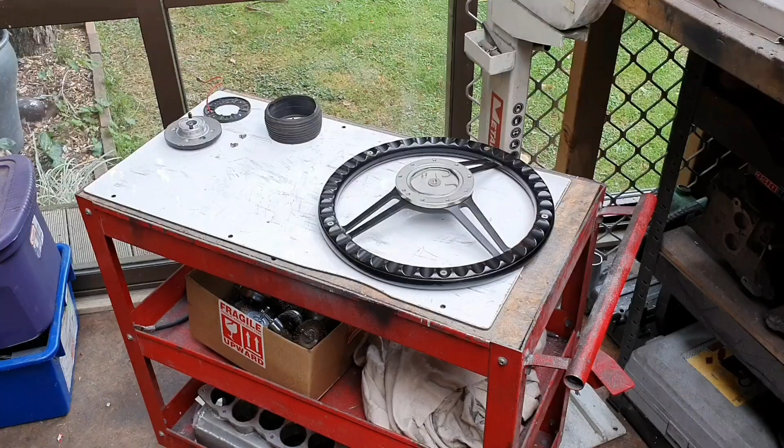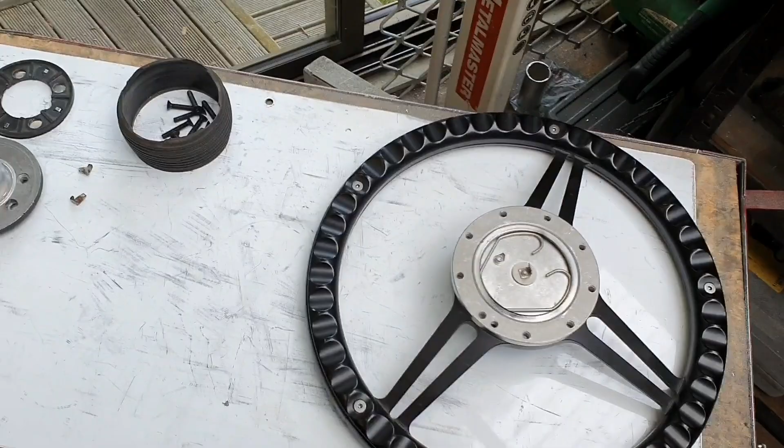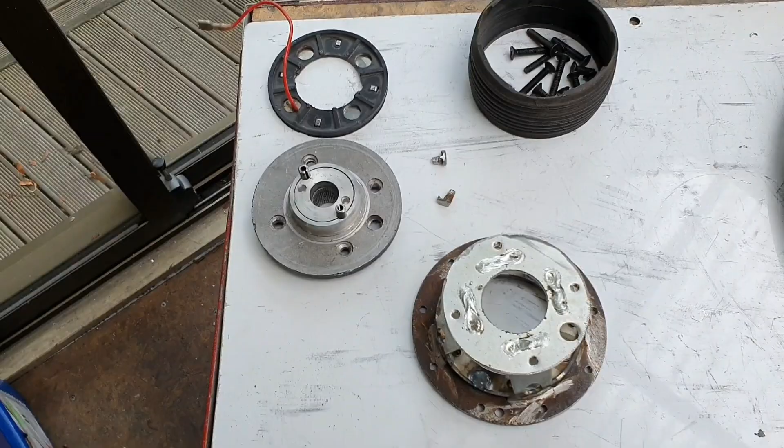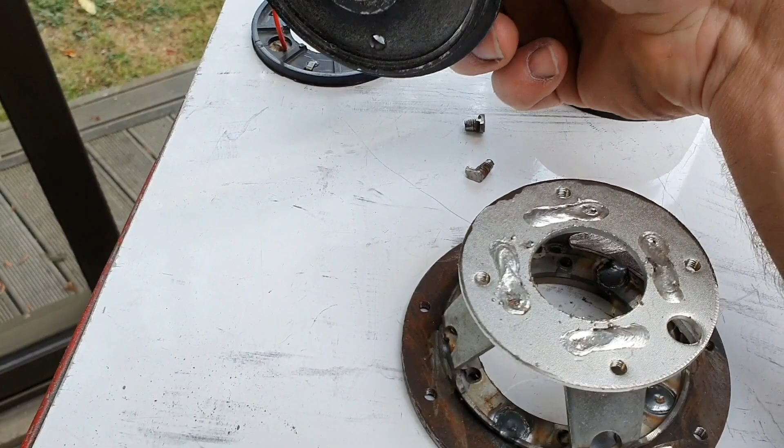Steering wheel for the Gloria. And actually, steering wheel boss. Here's the rest of the pieces that make up that. So, you go online and try and find yourself a steering wheel boss for a 1969 HA30 Nissan Gloria, and you will find there's simply no such thing. You can't buy them. Not as far as I can tell anyway, with all the research that I've done, and I've spent a lot of time looking into it.

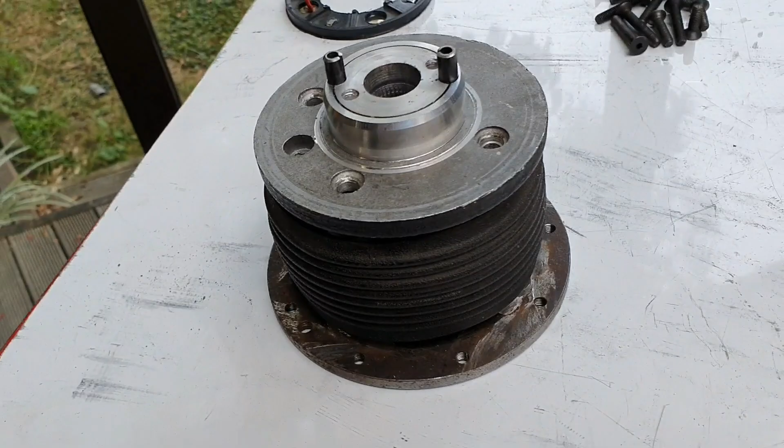This goes on there like that. That makes a steering wheel boss that has this cover, goes over this piece, makes it look pretty, a bit like that. That's probably what you're more familiar with seeing. This is from something, I don't know what it is from, but it's not from an HA30 Gloria. It doesn't fit properly, but it's close enough to do the job.

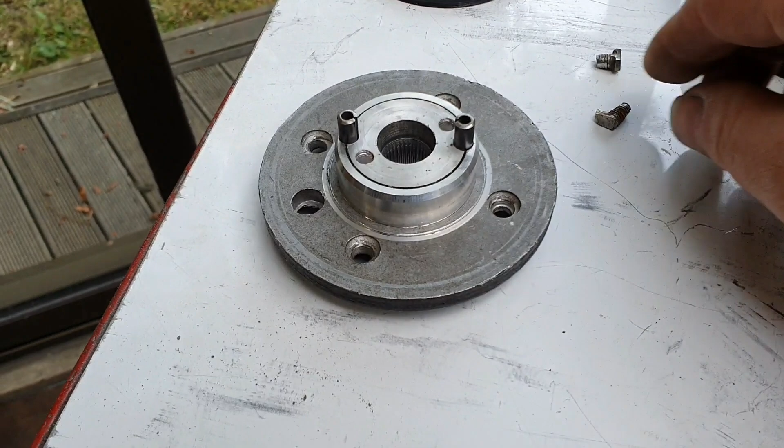Somebody had made these. These are just absolute works of art. Look, the thread on it is almost non-existent. It's almost a pin rather than a thread, and just some of the worst engineering you could imagine hanging off the end of that. A bit of weld just butchered into shape, and they were in these other holes here,

and actually, the outside edges of those were the wrong diameter to operate the indicator cancel system on the car, and also there wasn't enough height in this, and the pins weren't driving the system properly. It was riding up over the top, and they just were failing. Apart from the fact there really wasn't any grip as such, like this tapered, you can see it's a real mess into here, so the chances of these actually physically falling out and potentially jamming up the steering was pretty high. It was a good chance that could actually happen.

So this was too small a diameter, so I've taken a tiny fraction off the outside of it to get a good smooth surface. Made a collar. I was going to call it a bush. I'm going to call it a collar because it sounds better. Collar to go over the outside of it. That's pressed on there nice and tight, and then we can drill our holes, basically right smack bang on the edge of the original part that was here, and put some roll pins in there, and now the indicator cancel system works perfectly.

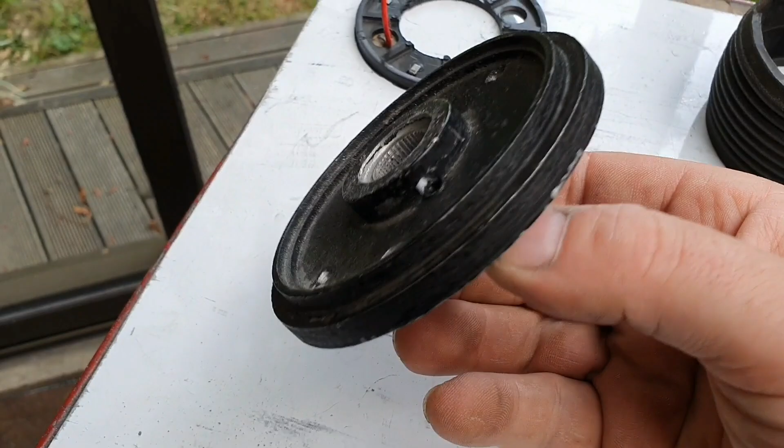So that's awesome. I fixed that. This piece here is now good to go. We're all happy with that. I'm happy with that. Certifier will be happy with that. LVVTA should be happy with it. There's no welding or anything dodgy on that, so that particular part there, that's good.

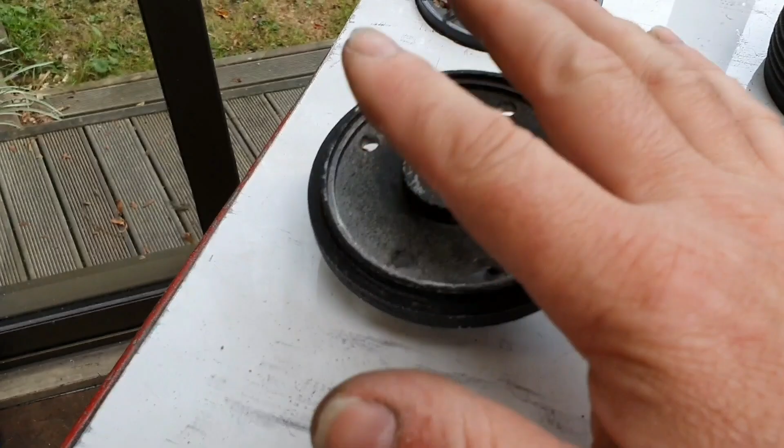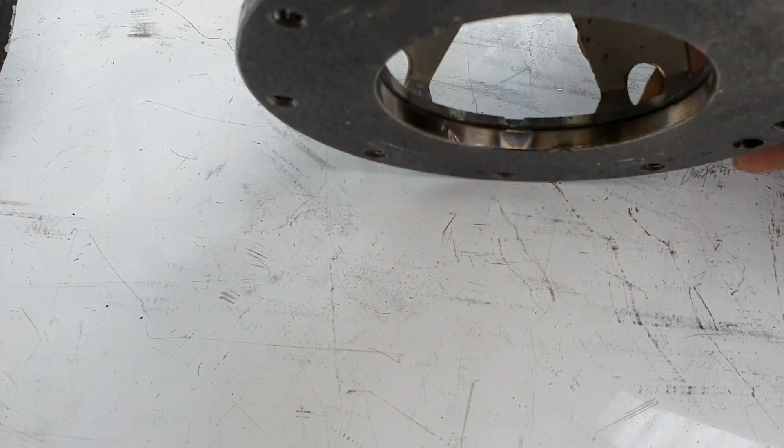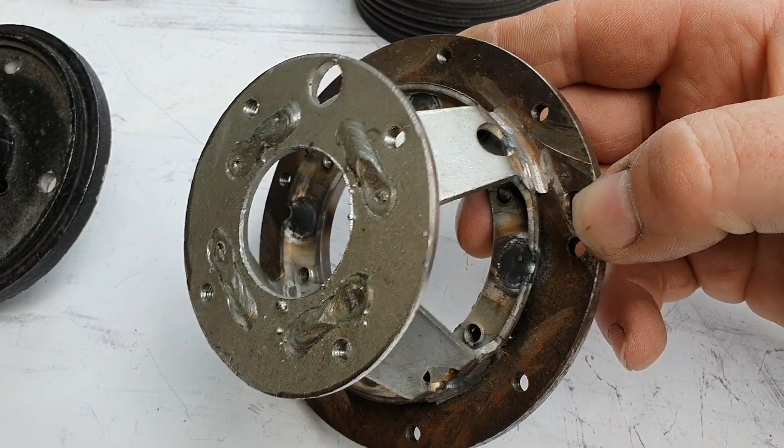This part here is scrap metal, because as you can see, somebody, apparently it was an engineer down the South Island did this for the guy that used to own the car. He's welded this plate onto here to adapt this steering wheel to fit a boss with a different PCD. Why he did it that way, don't know. It doesn't make any sense to me.

Should have drilled and countersunk some other holes in here to suit that boss, and just made a simple adapter plate rather than welding this on here and effectively writing this whole thing off and making it illegal. And then it's become my problem. That was sketchy as. I mean, it's alright, only holds the steering wheel to the car. Nothing safety critical or anything like that, right?

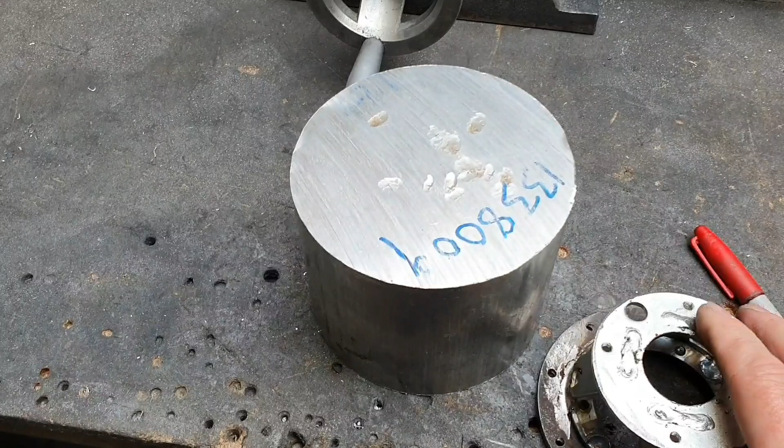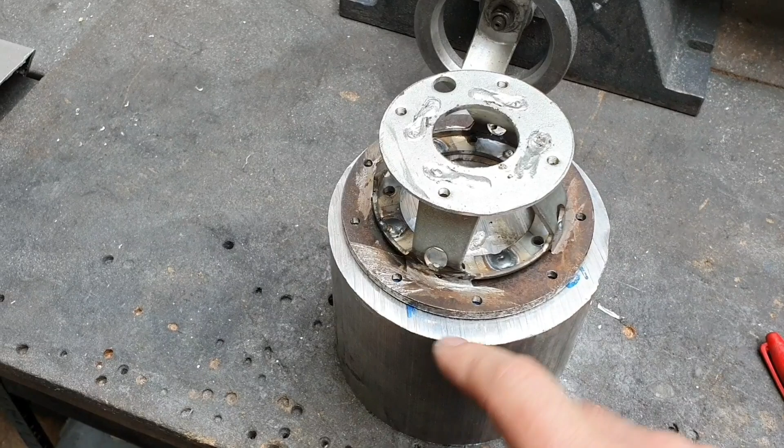What we have here is a very large lump of aluminium. I mean, the size of my hand there. I don't have tiny little hands, so it's a pretty big lump of aluminium. That's going to go on the lathe. I'm going to make that out of that effectively. That should take a little bit of time.

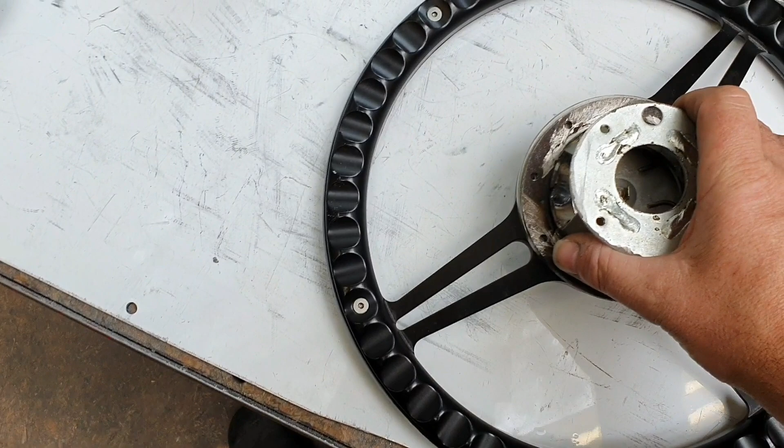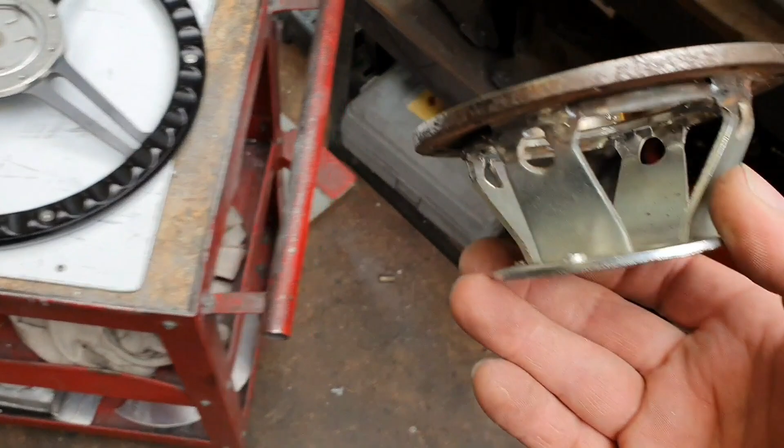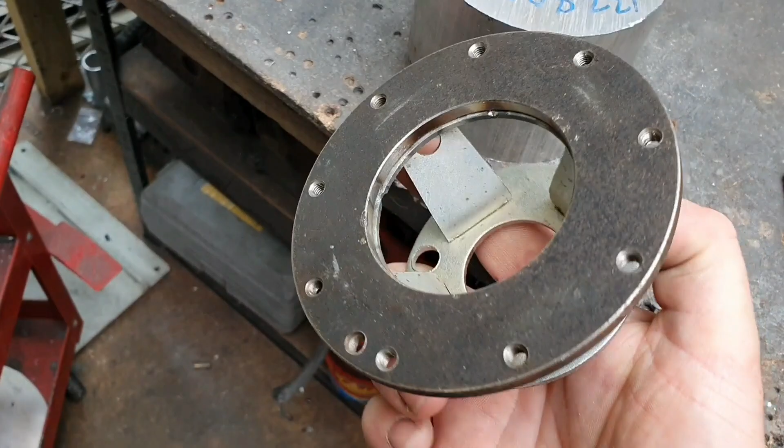We'll give it a bit more edge distance. Certifier was concerned about the edge distance, so we'll give that a bit more. Even though that was made to match up nicely with the horn adapter and all that, I'll taper it out from there so it relieves his concern about that. And we'll get on with it, we'll get it done, and then I'll smash this to pieces with a hammer, because that silly move by someone down the South Island has cost me a lot of time researching, trying to find one. You know what? Let's get started.

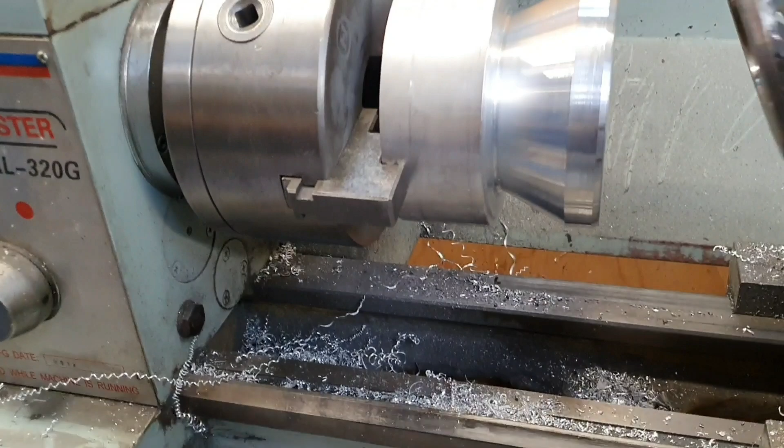Off to an okay start. Sort of got the angle, it's close, a bit big at the bottom maybe, but that's alright. Nowhere near finished yet. So that's that. It's a bit bigger, as I said. That end there, that's not bad, see that? I've tapered that out to try and make it look nice. It's pretty arty-farty, isn't it? So next step, I've got to bore out the guts of it in the middle there.

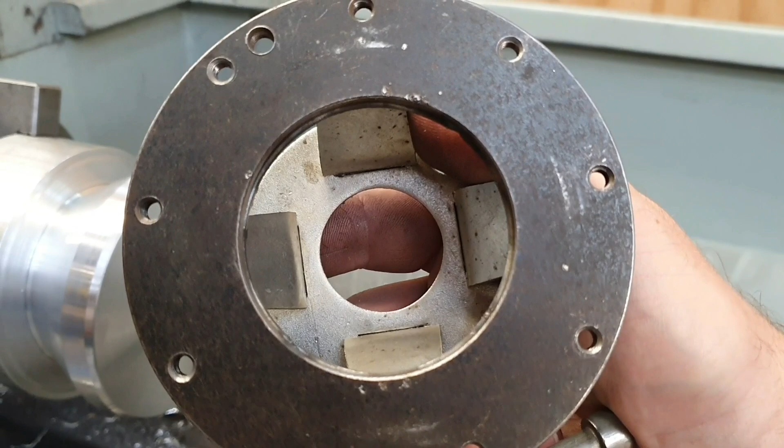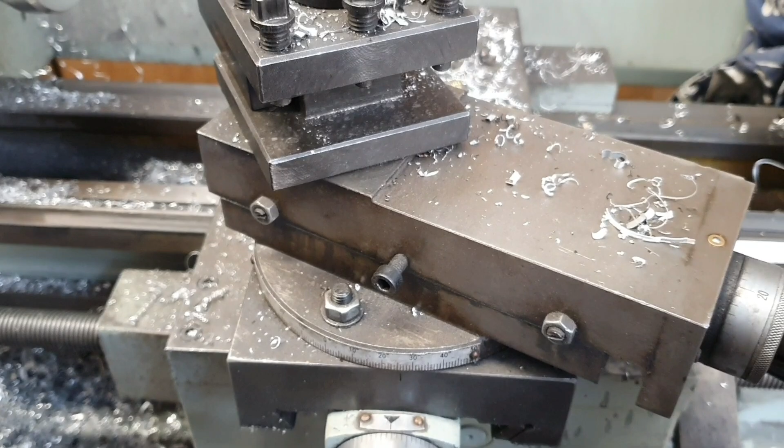That'll be pretty simple. It'll be just figure out what that angle is from this base to that face there, and the distance, and then bore a big hole up the guts of it, set up my headstock or whatever you want to call them, slide, horizontal, vertical, what is it, longitudinal slide, that'll do. I'm going to call it that today. I've forgotten the actual technical term for it, but set that up on the correct angle and get in there and machine the cone in the end of that.

No, don't make marijuana jokes, it's nothing to do with that. Yes, I know I'm called the lab and I just said cone, whatever.

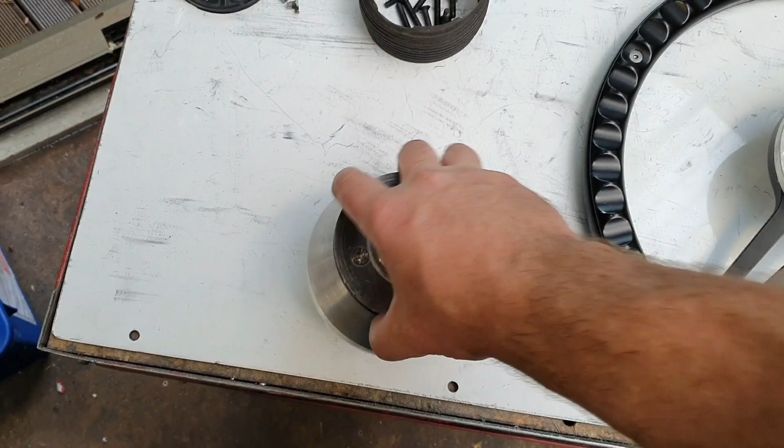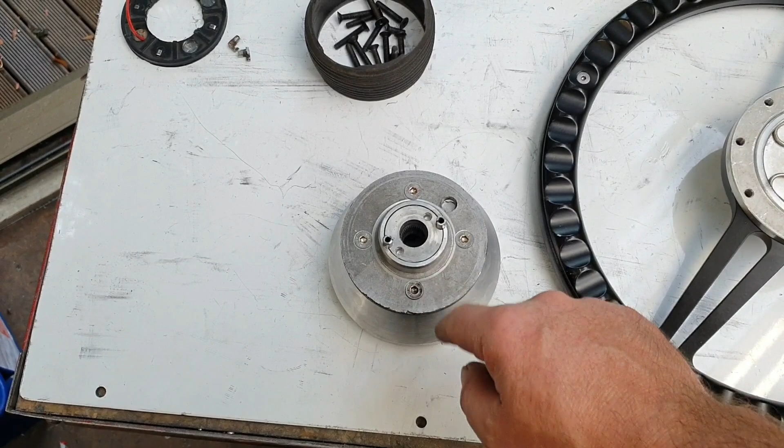Anyway, so do that. Alright, that's that done. That far anyway. Pretty heavy. Not worried about that too much. Drilled and tapped into the back of this new piece that I've made. Upgraded the bolts from 5mm to 6mm. Give it a little bit more strength. Was considering putting another couple of bolts in here, but I don't think it's really worth the hassle. Those bolts will probably have more strength than the connection from here to here anyway, so there's no significant point of failure to worry about there.

Next is drill those holes that you see on that piece into this piece here. A little bit late today, so I'm not going to bother with that today. And I have to poke a hole through there for the horn wire. That one there. So that'll be easy enough. I'll just put that in the drill press and just drill straight through. It'll poke out the other side here and we'll be sorted for that. Only a small pile of swarf on the floor there, not too bad.

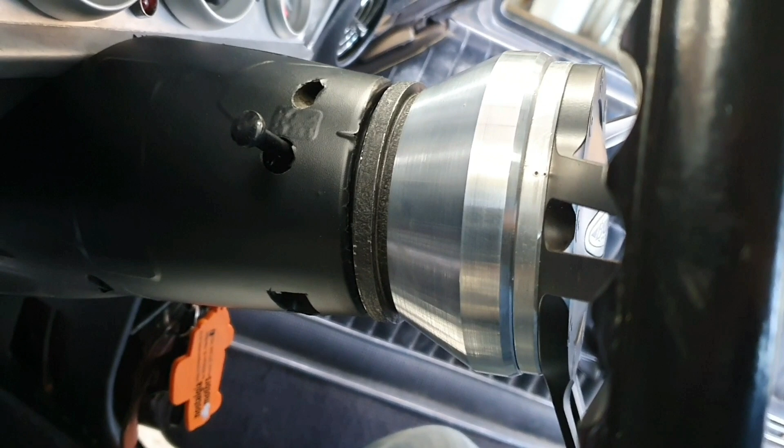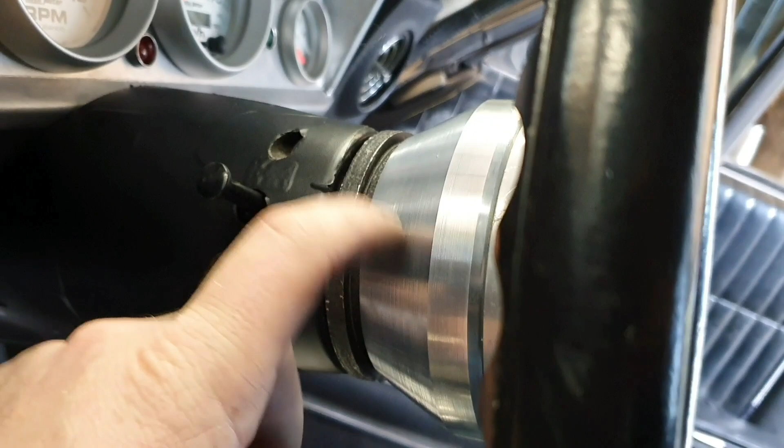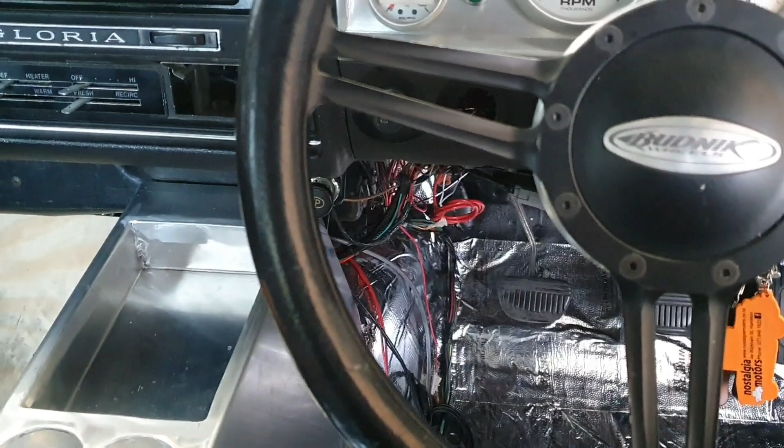And there we are, fitted into the car. Looks not too bad. Obviously the original base there, not the prettiest thing in the world, but we'll just leave that be for now. The customer's possibly going to want to anodize or powder coat or paint this. This piece here definitely has to go black. That's what he wants. This all has to come out of the way to get that out and do that. That might be happening soon due to delays with LVVTA. Happens, not going to complain, moving along. That'll go black or body colour, or you could even do a little bit more tidying up with the welding and stuff, and that could be polished, which would look quite trick.

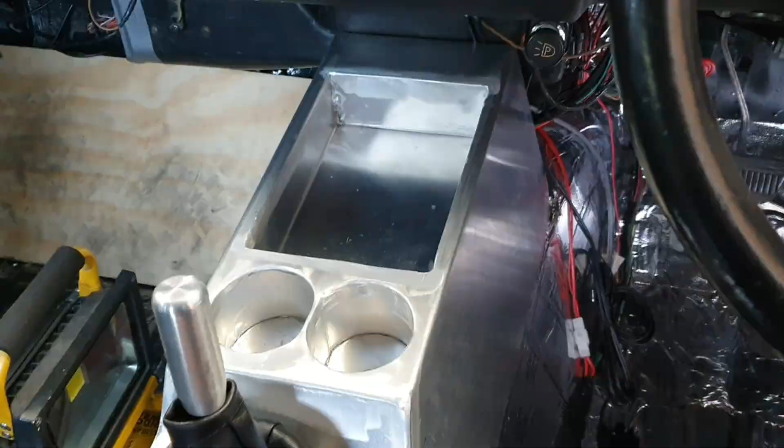Indicator delete is now working, so here's our turn the wheel to the right, that's all good. Turn it to the left, turns the indicator off, that's cool. Turn it to the left, turn the wheel to the right, turns the indicator off. Awesome, that now works. It didn't when I put it back in. I think it was the turning to the right, it wouldn't cancel, so I had to adjust one of the tiny little mechanisms in here. By adjust, I mean take it out and put it on the bench and literally hit it with a hammer and put it back together, and now it works. It wasn't working because it was just slightly more worn than the other side.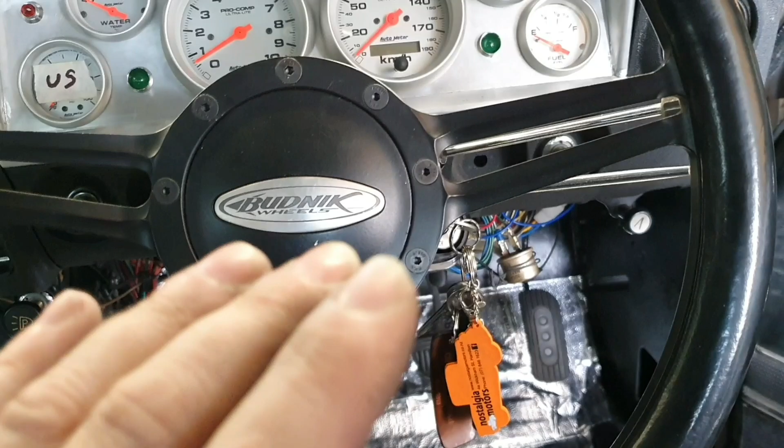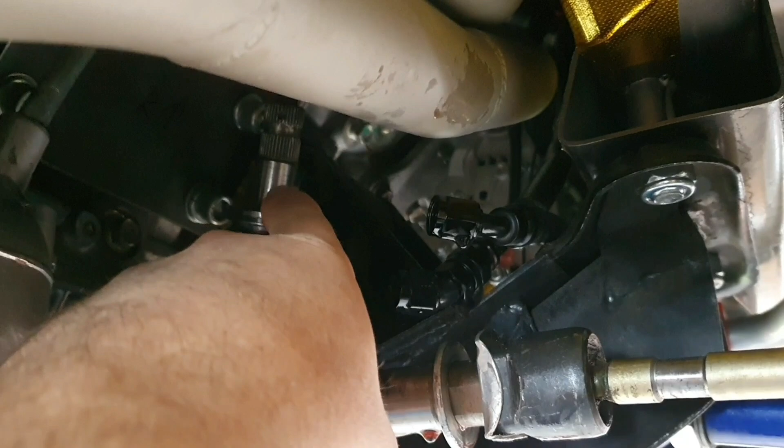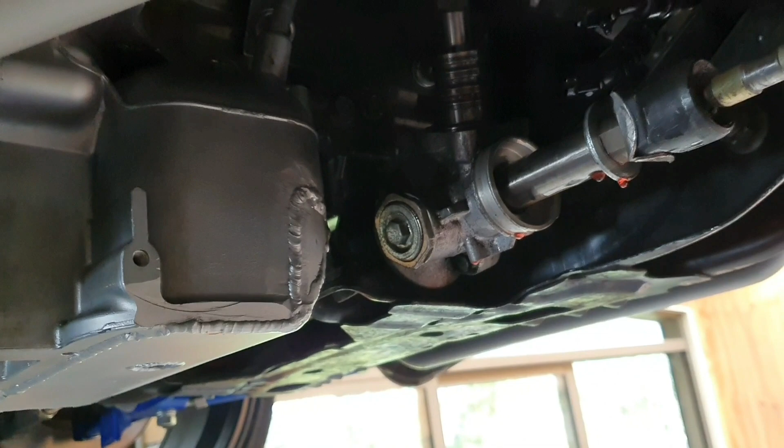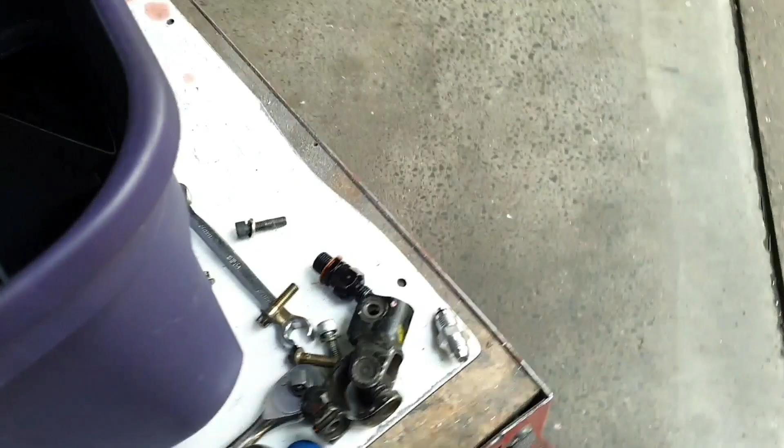Okay, it's dealing with this power steering leak, which is basically the seal that goes onto the shaft here is the one that's leaking. So not particularly easy to get the rack out of the car. Some idiot designed it, so it was a bit tricky. That idiot being me, but never mind. You can, however, get that housing off there. So bit of fluid in the bucket there, a couple of hoses and bits and bobs. And over here we've got that housing. So it goes on just like that in relation to the car, right? So it's the front of the car. This is the seal that's leaking.

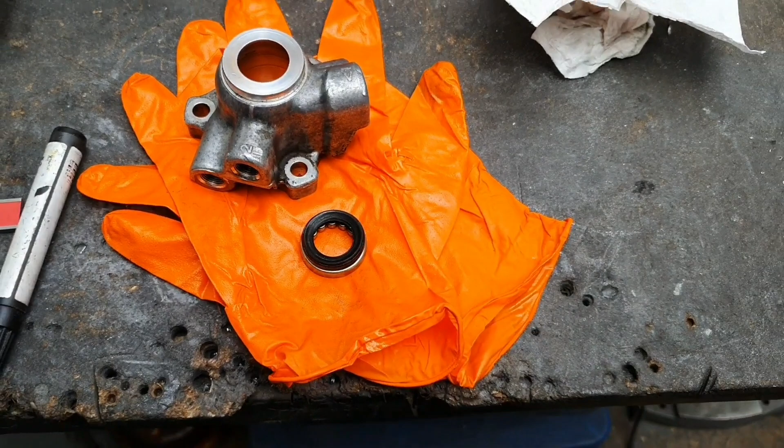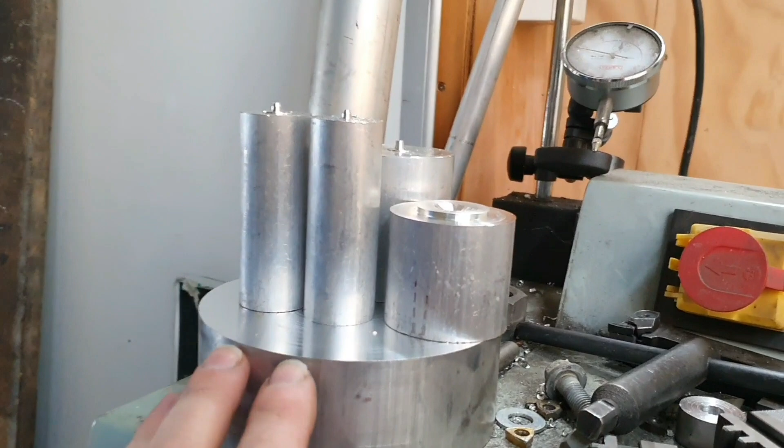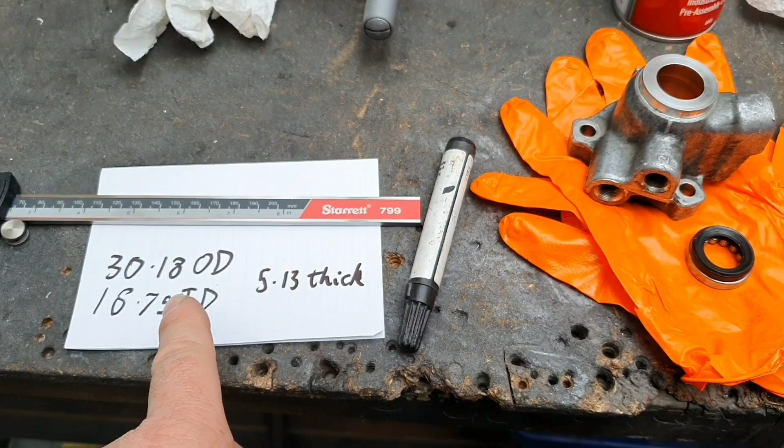And of course, because it's a Gloria and it's decided that it's going to fight all the way, nobody's got that seal in town, so we have to order one of those. And hopefully the couriers get it to us tomorrow. Very unlikely. Although, to be fair, the lump of metal on the lathe here, this one that I cut down to make the steering wheel boss, that did turn up on time. So it can happen. It just doesn't happen all that often these days. So that's ordered. Wait for that. When that turns up, I can put it back in here and put that back together, and hopefully that fixes our leak. She's a bit of a funny size. Looks like it's an imperial size, not a metric size, which is pain in the brain being a metric car.

Alrighty, so Friday morning. Actually a nice day today. Not humid. Look at that. That's beautiful. Cicadas going nuts out there.

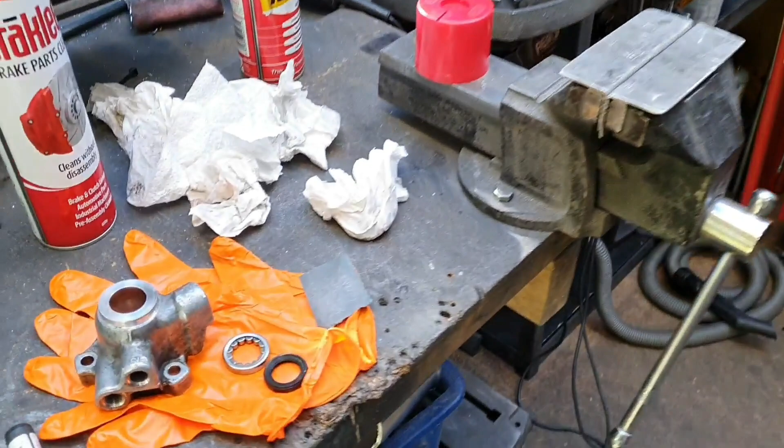Yeah, it's 8 o'clock on Friday. I'm tired of this. This is holding us up. We're waiting for... sorry if this is making you feel seasick, swinging around all that. We're waiting for one of those. Might turn up today or it might not. So in the meantime, let's do something fun for a Friday.

Let's go put this on the dyno and see if my... look, the door's closed. Oh, preparation's terrible for this video. See if my new inlet manifold that you'll barely be able to see in there. There it is. Shame we couldn't do that this year. Never mind. Brand new inlet manifold and throttle body, bigger throttle body, trumpets and everything. Showed you all that. Let's see if that works.

And my cold air intake. You can sort of see that there. Some of it, stuff and things. Let's see if that works. Oh yeah, that's cold air intake there. That's about all that's changed. So let's see if we can make... We had 400 kilowatts at the wheels exactly on 17 psi.

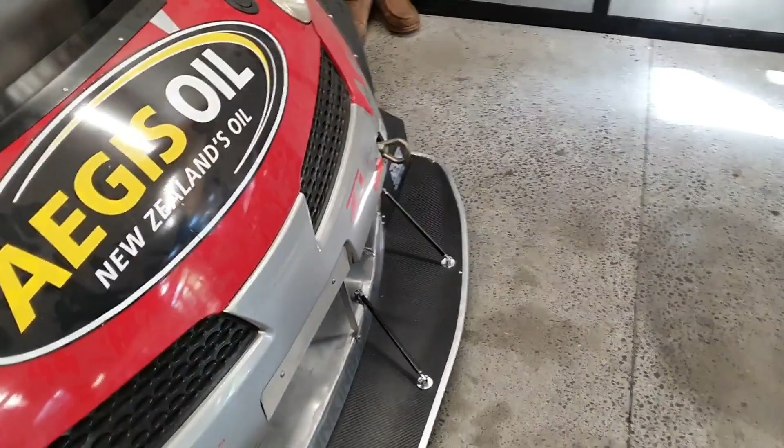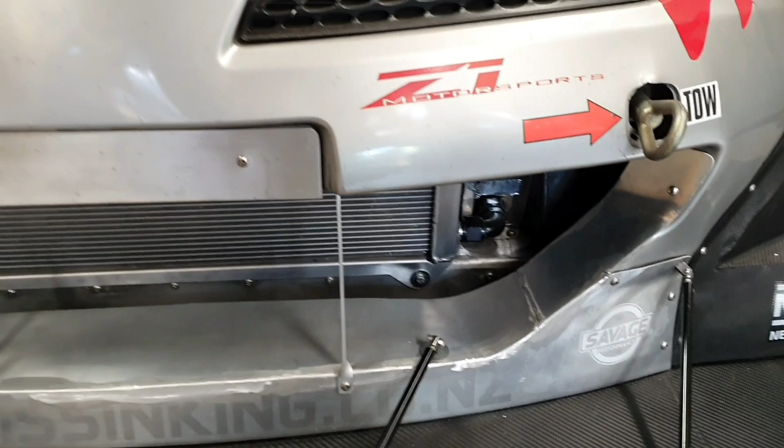So since then we've got a bigger radiator in the front here, bigger fittings all the way through, bigger fittings on the intercooler itself, and better manifold, bigger throttle body, and colder air intake with better air filters. Surely we can get like 4 more kilowatts. Let's go find out.

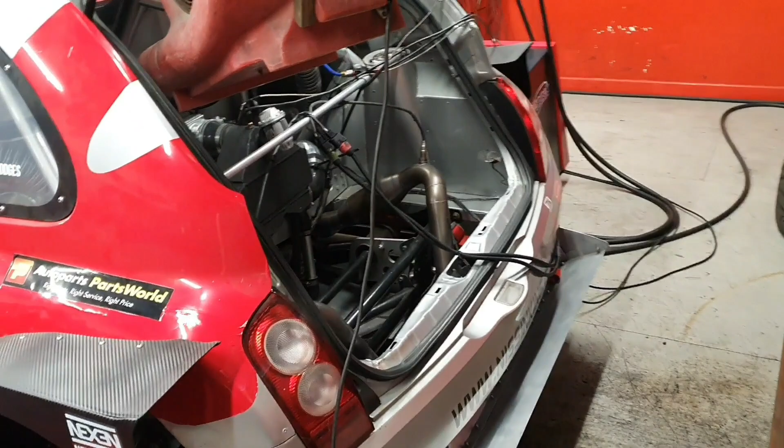Alright, on the dyno, not going yet. It's a good sign when you open the boot like that. Never mind. She's far from clean, and it pays to make sure that you do actually have petrol in the car before you bring it to the dyno, because despite having fueled it to the brim and having never gone anywhere with the car, running it at home uses up quite a lot of fuel. So quick trip back home, 5 minutes each way, put some petrol in it. Whoopsie daisy. All ready to go, although it is lunchtime, so we'll do that.

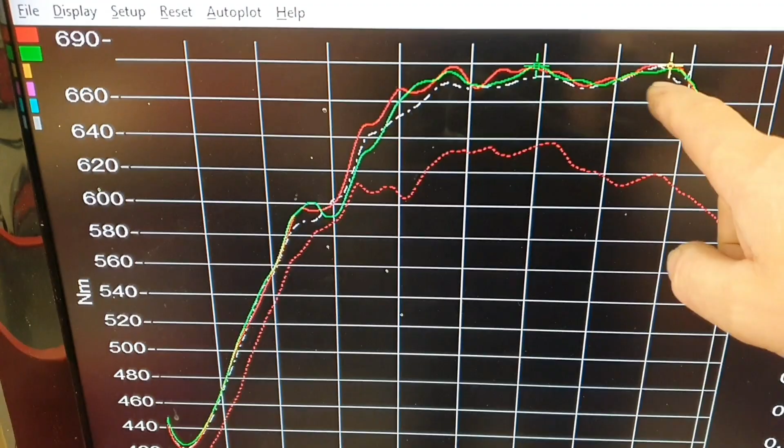Net gains are almost 10%, depending on what you're looking at. Here's the original trace on the torque. So we had a peak torque of almost 640 Newton meters, and now we're up probably for a longer area too. Yeah, it's a flatter curve at top, isn't it really? 680, I'm going to say, something like that. 680 Newton meters torque at the engine. It's kind of a guesstimation based on the diff ratios and stuff, but that'll be pretty accurate given these dynos. Same boost, so not bad.

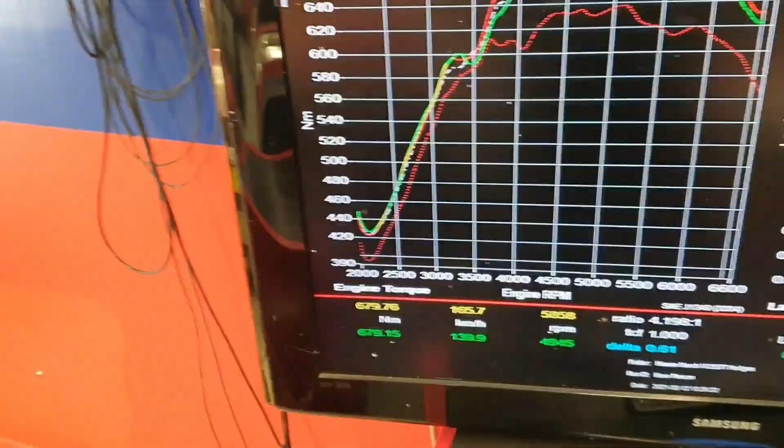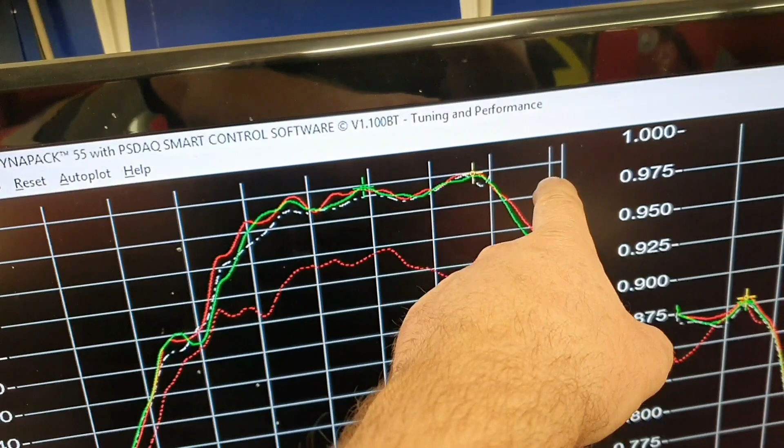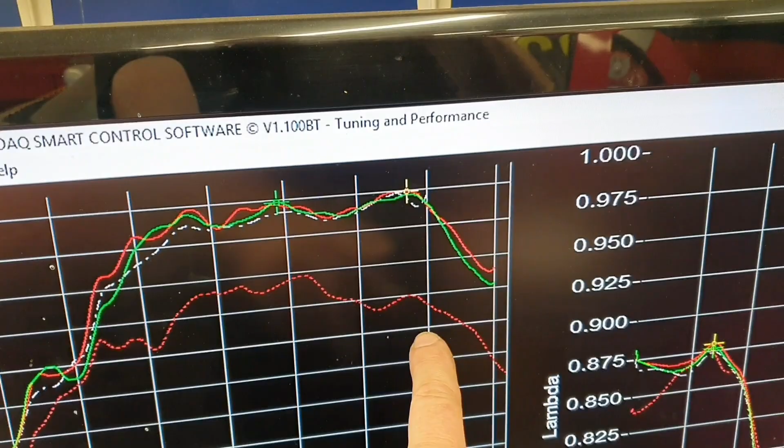I'm not going to scroll through it, it's not my machine, I'm not going to muck around with it. We've got 430 kilowatts on our peak power, and it's just a line like this. It's just going to the moon. It's starting to drop off a little bit here at the end as this torque is, I'm not going to say crashing, but it is falling off quite steeply, probably a little bit steeper than the original one, but from a higher value, so we've still got more torque.

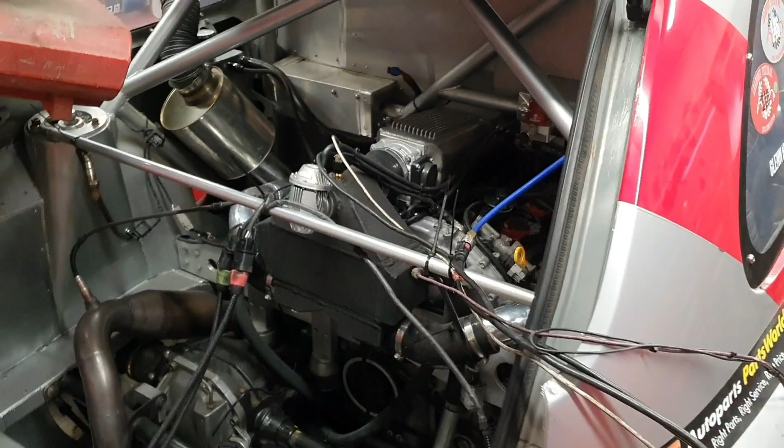So net result so far, okay, just in case we break it, but stuff and things that I've done in here, they have worked very well. The car should go quite a lot quicker than what it was before. Nearly 10% at this point. It might even be happier to take more boost now than before. We were at 17 psi. I don't have any problems running 20, as long as everything's okay, so we'll see.

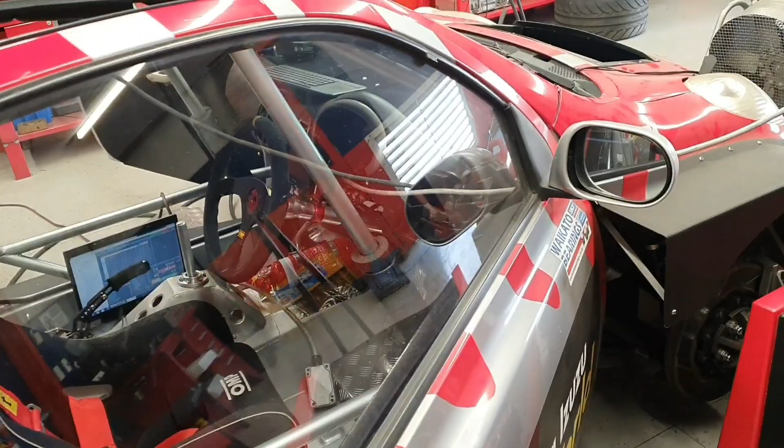If we put another 1 or 2 at it, I think we'd easily get 450 kilowatts. Yeah, at the hubs we're talking quite a lot of drivetrain loss on this car, so 430 now, we're already way past 450, 460 at the engine. Yep, happy times, lunchtime, come back.

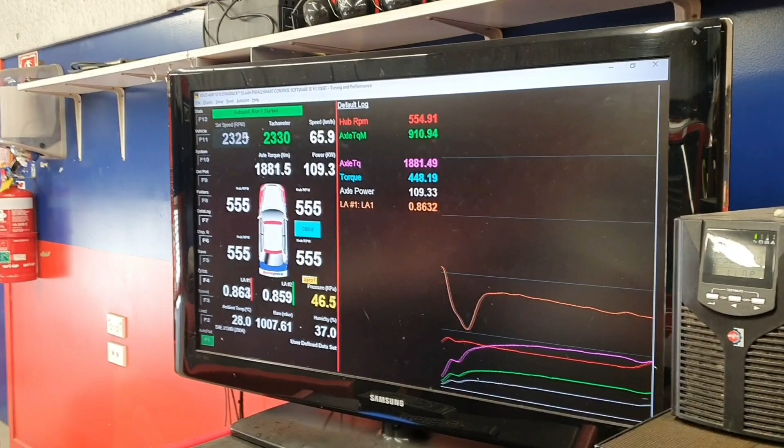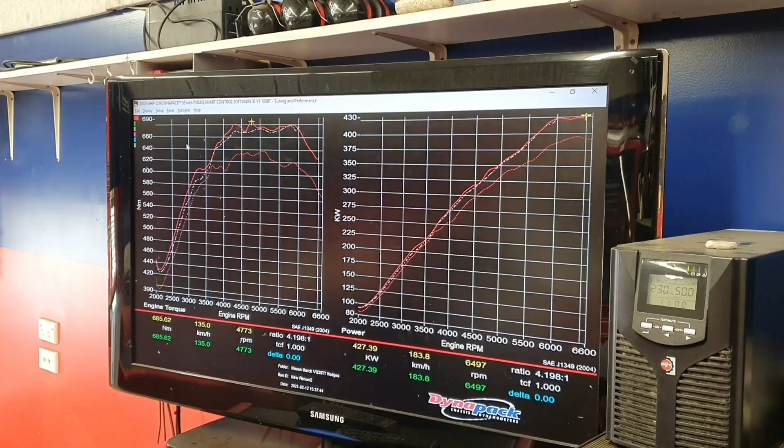Alrighty, so I think we're at 420 something kilowatts at the hubs. Repeatably, that's near enough 430, it's pretty close. Good gain on torque and power. Done for the day as far as tuning and stuff. Fluffing around now with a bag of ice in the intercooler tank. Some of it went in there, some of it went elsewhere. And my hand's pretty cold now, but yeah, it's a bit of a mess.

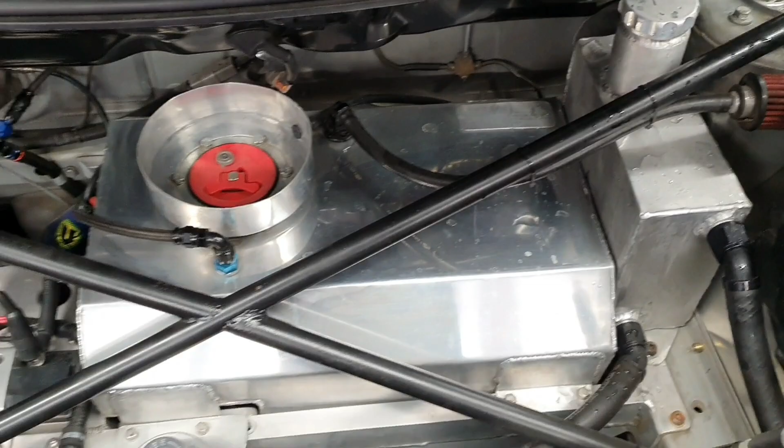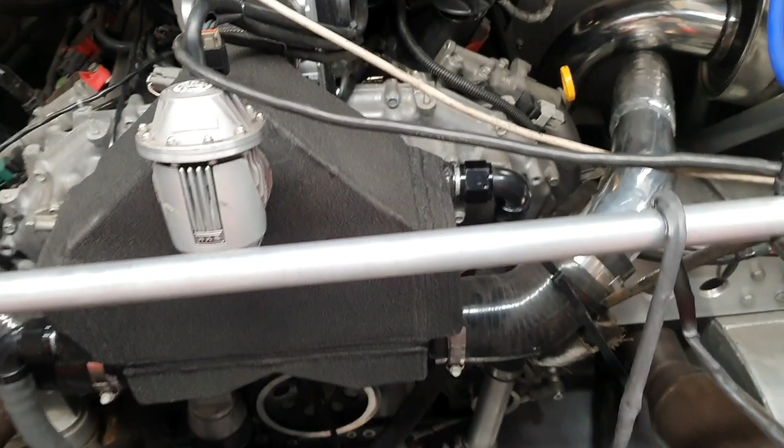So now we're going to see what happens with intake air temperatures. We were seeing 100 out of the turbo. Let's come around here to the noise. Sorry, crashed the camera. That sensor there was saying 100 into the intercooler. That sensor there was saying 50. So now we're going to do a couple of runs, make sure it's all cycled through properly, and see what happens when you've got ice in there, how much difference that makes. It should make some. How much is the question?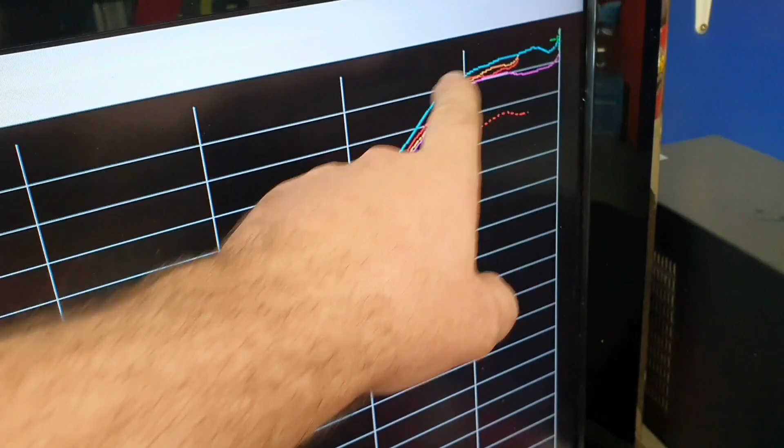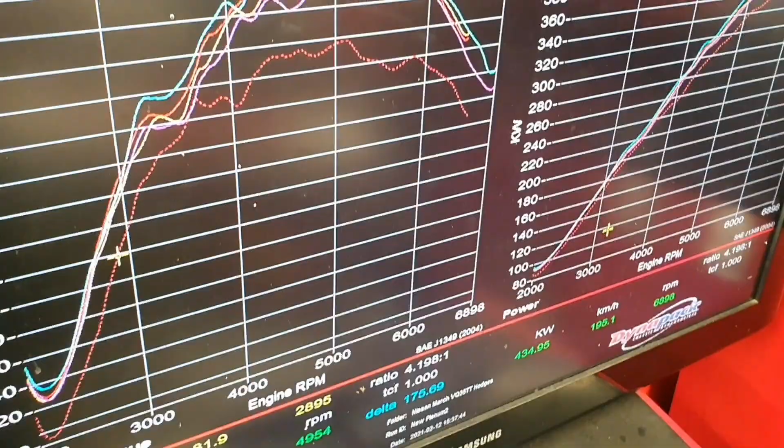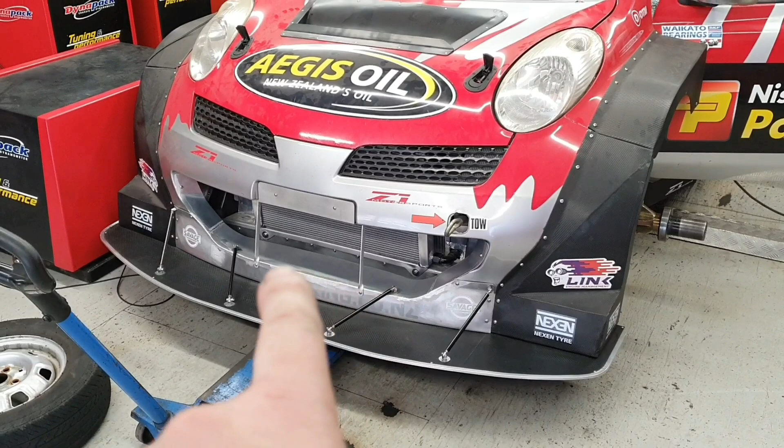So there we go. It's all quiet in here now. And you can't argue with the laws of physics, and the laws of physics say that 30-degree ambient temp in here, or close to, and a lot of air blowing through our fancy intercooler radiator thing here at the front, so all the water that was coming from there going into that tank was probably close to 30 degrees, 28 degrees, something like that. And our couple of litres of ice, couple of kgs of ice, basically one run, and that was gone.

So it's a bit different at Super Lap because the cars can sit around for a bit and everything can cool down, and you're not trying to chill down the entire cooling system with your one set of ice. That'll all be cold when you put the ice in. It'll last longer. You get a little bit more time. Certainly worked at Leadfoot. Haven't tried it at Super Lap yet. Haven't bothered.

Right, full disclosure, at home now, behind the door, done and dusted. Here's our dyno sheet. The bottom line, the red line, that's our previous runs with this car on that exact same dyno. That's the best it got, so it was bang on. It doesn't look like it on this one, but it was bang on 400 kilowatts, or just near enough, you know. And we were looking at it as like 640 newton meters of torque, something like that.

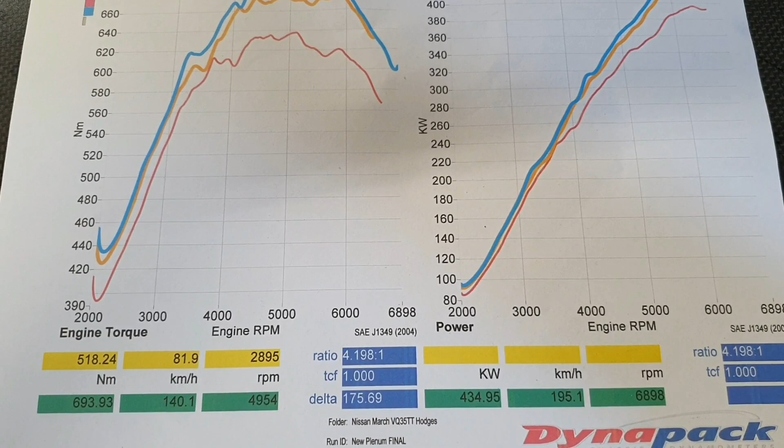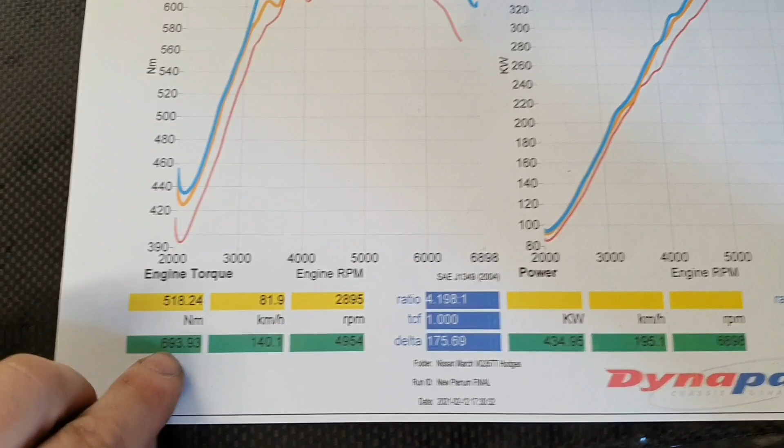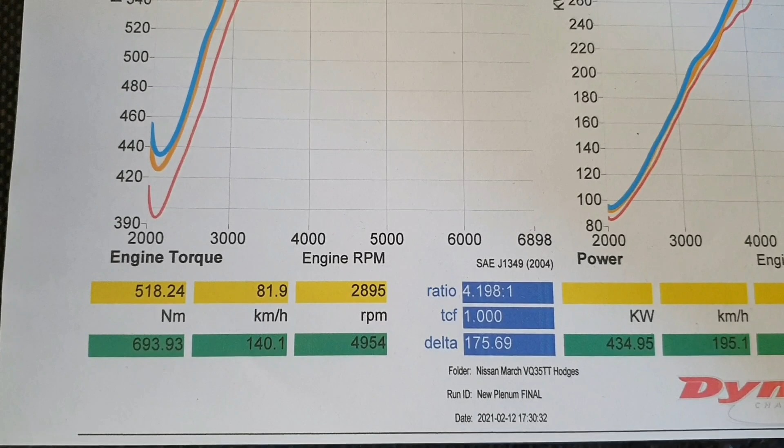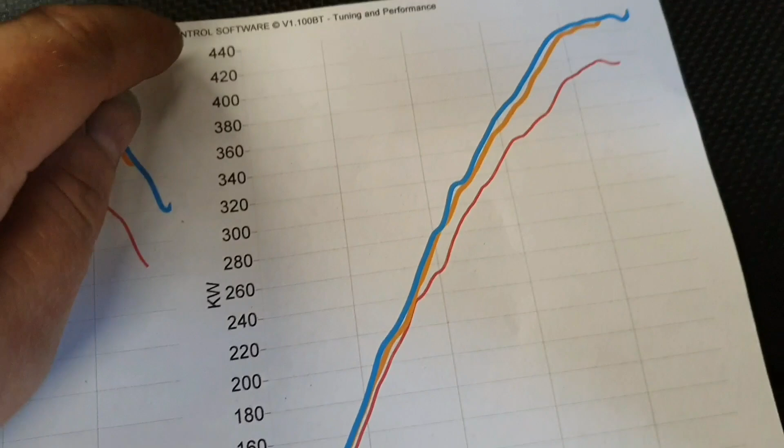So the best run we did today was just short of 700 newton meters of torque. We got 693 or something according to that, but it's not necessarily the peak. It's just where the cursor was when it was giving these numbers. So the peak was actually a bit more than that, 695 or 6 or something like that. It was close enough, doesn't matter. Just short of 700 newton meters torque. The horsepowers, kilowatts, just short of 440 kilowatts, 435 give or take.

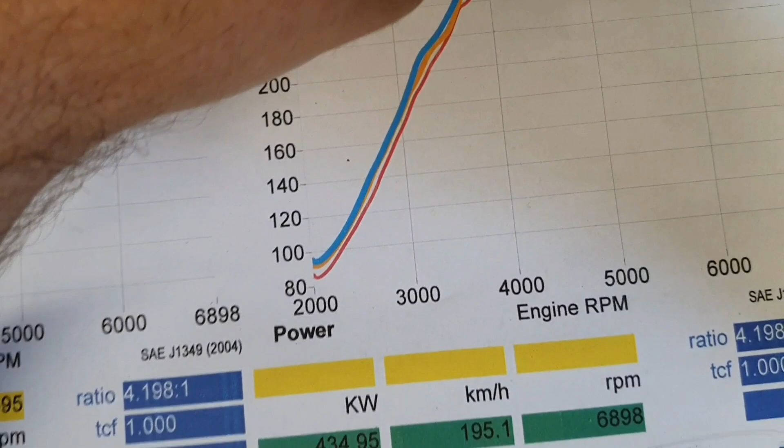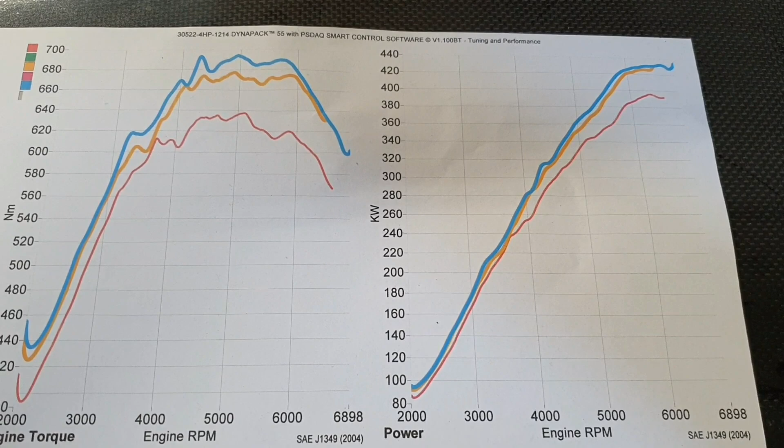And then the yellow run. Camera's getting bad today, isn't it? That's me. Yellow run is pretty consistent. That's what we were repeating time after time after time. It was doing that easily. The blue run, so the peak that you see there, the best that it did, that's when we chucked the ice in there.

You can swap the camera. Here's ugly face for the day. I'll shift my hand out of the way so you're not seeing that.

So when we did that best run, the blue run, the peak power for the day, that's not repeatable. That was a one-off, and the one pull was enough to put enough heat into that system to take care of the ice. It was gone after that, so the next run would have been slightly less power than that, because the inlet air temperatures would have come up and it would have started pulling the timing back in the chart. So with the ice in there, it dropped it down in the chart, so to speak, so that it only pulled a tiny little bit of timing out of it, like half a degree or something like that, instead of about 1.5 degrees or something it was doing on the rest of it.

So yes, it made more power with the ice in there, because the intercooler was maybe marginally better. It was not a lot of difference in the air temp. It was 4 degrees or something like that we saw. So yeah, it was colder and it made more power as we expected, but not a lot. And not all of it's just purely because, well, it kind of is and kind of isn't, because the air's cold. So yeah, made more power because the air's cold, and because you could have slightly more spark timing without running into detonation, stuff like that. So before anyone posts up and says, yeah, but I know, I'm not stupid, I know these things. So what it actually needs to make more power is a bigger intercooler in the back. What a surprise. We've been saying that for some time.

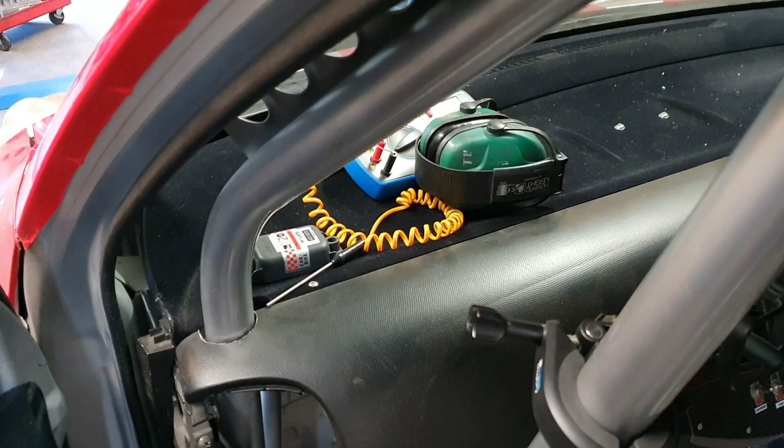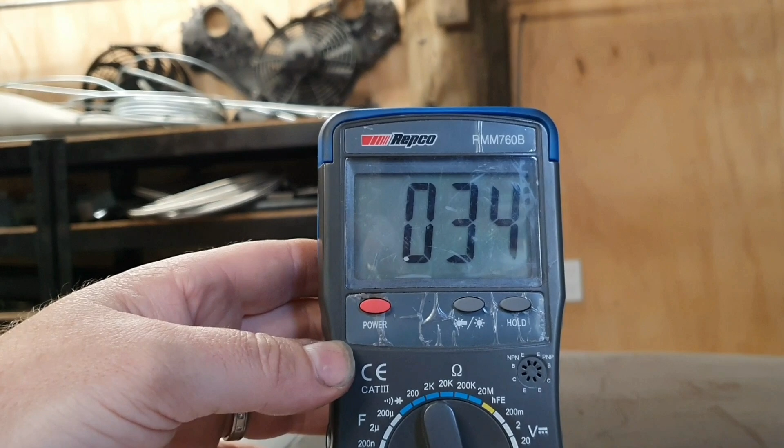So the multimeter set on the old thermometer probe there. Bang that in the coolant tank. How hot are we in here today? Pretty warm. Oh, it's coming down. In the car it was hotter maybe. So bang that in the header tank under the bonnet there to see what was happening with the coolant temp. Come back, swapping cameras left, right and centre. To see what was happening with the coolant temp, so we would know whether that was getting hot and that was stopping the intercooler from working.

And it's not. It was running at about 28 degrees. I think I might have mentioned it earlier on the video. It was sitting about 28 degrees, something like that, which is pretty much ambient temp, a couple of degrees below that. So we've got a big enough radiator, we've got enough coolant moving, we just don't have a big enough intercooler to take the heat out of the air and put it into the coolant. So, as I've said many times, bigger intercooler on the back, and we should make more power. So, all good.